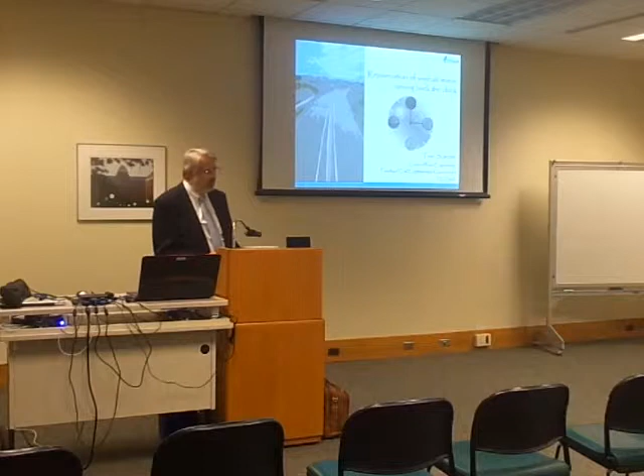Rejuvenation techniques also meant that as a group of road engineers, we had to step back, because a lot of these techniques do not imply I make something, I break it, and I sell it, but please help me to understand why it is better before I even make it. So as a group, we were led to smaller and smaller scales in the hope that, if we work with the industry at that level, we could influence the deliverable, we could participate in the deliverable, we could learn, but also they could benefit from our expertise. So what I want to present is really an attempt to engage a whole sector of experts, always leading to a better product, a better paper.

Very quickly, I wanted to show where I come from. This is an overall view of Delft University of Technology. We are the only technical university in the Netherlands. It means engineering is only done in Delft. You can see the civil engineering building over here. You can see Rotterdam on the horizon. The Netherlands is a small place. Before you get lost, you hit a border, and then you know it's time to come back. So you can see many cities from my office.

We have a number of faculties, the faculties that a typical technical university will have. Civil engineering is an average size faculty. We are combined with geosciences, and we provide civil engineering education in the Netherlands.

Because we are a technical university, we operate at faculty level. We have a faculty of civil engineering, not a department, but we have departments within the faculty. And our department, I put it down here, the pavement engineering group, about an estimated 5 academics and several PhDs, masters, postdocs, etc.

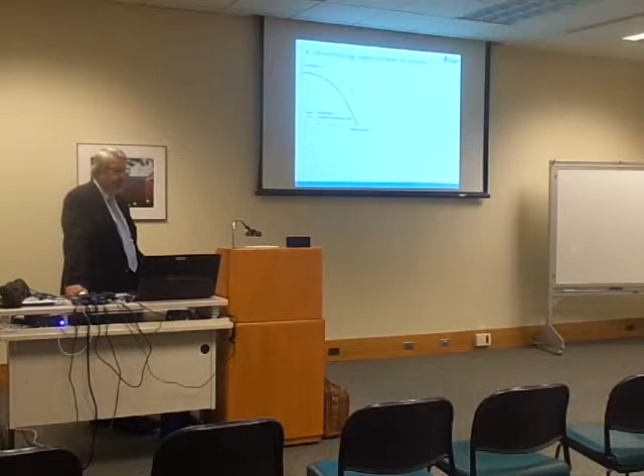At the average life of pavement, normally if you do nothing, it will tend to degrade, as I tried to show here in the sketch. As time passes, performance drops, because material properties degrade. One idea is to say, okay, every now and then I'm going to do something. I'll wait for a few years, and when my performance, whatever you choose to call performance, reaches a level, I'm going to do something.

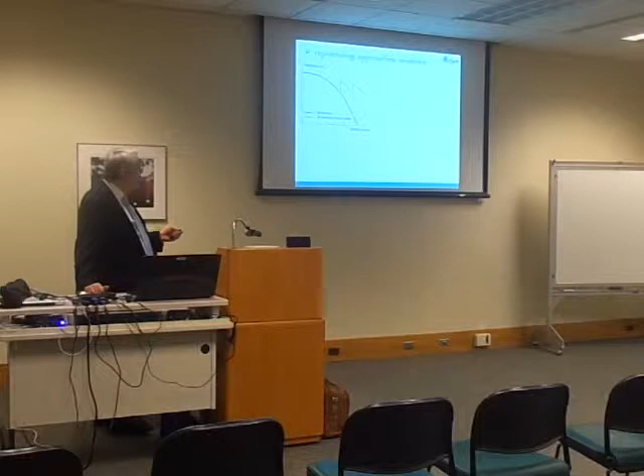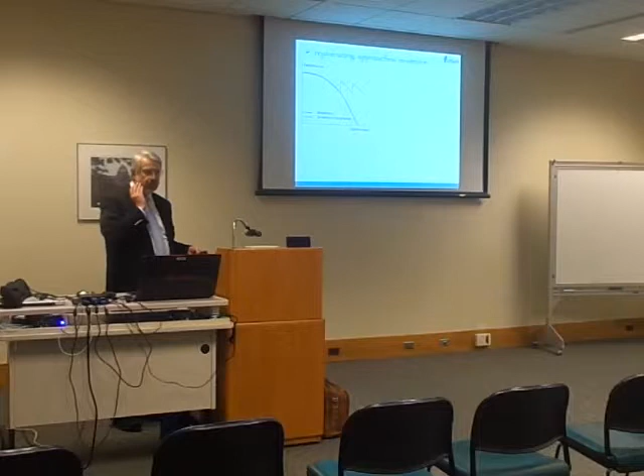And in terms of the rejuvenation techniques, the name that you see in the industry is the in situ. So you have a pavement there, you don't go and remove the material. That's another thing. You have to try to do something to rejuvenate. When you put cream on your face, you don't take your face apart, you hope. So the first level of techniques that I want to look at today at least is this: techniques which allow you to really make the material new.

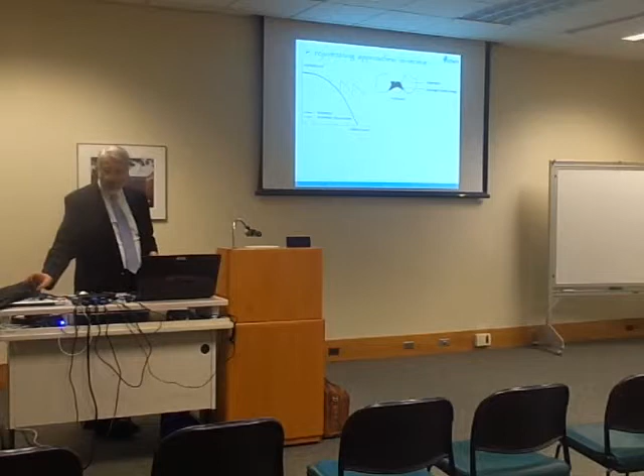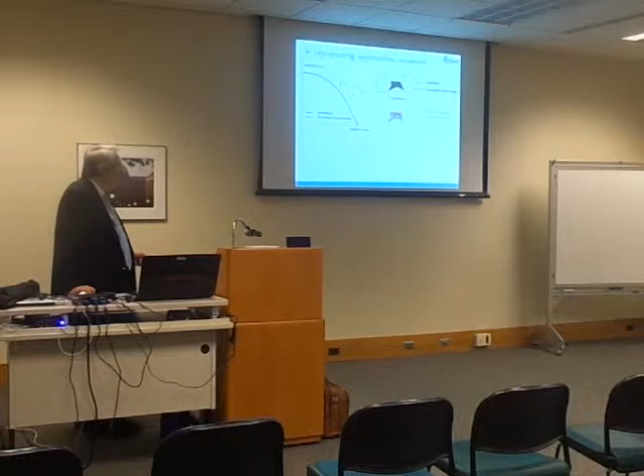How do you do it? Well, let's say on the local scale you have two pieces of aggregate and some material in between, which, because of aging, because of punishment, can be because of the weather, environmental effects, whatever, started going harder, cracking up, misbehaving, degrading. One possibility is to go and put something, a face cream. That's what it is. You apply it, hopefully not with a piece of cotton, but with a spreader. At night, so you don't disrupt the traffic, or on the weekend, less traffic.

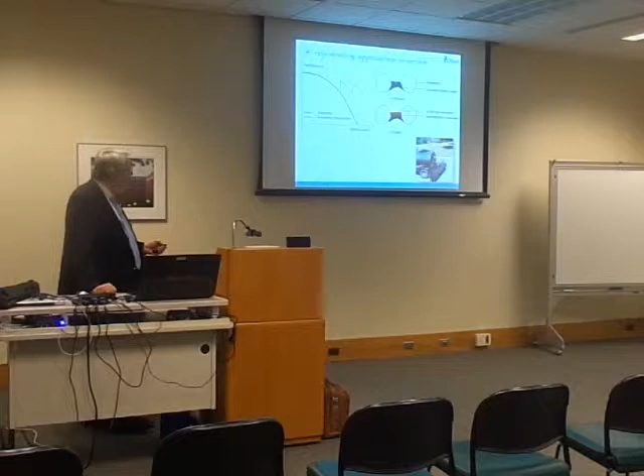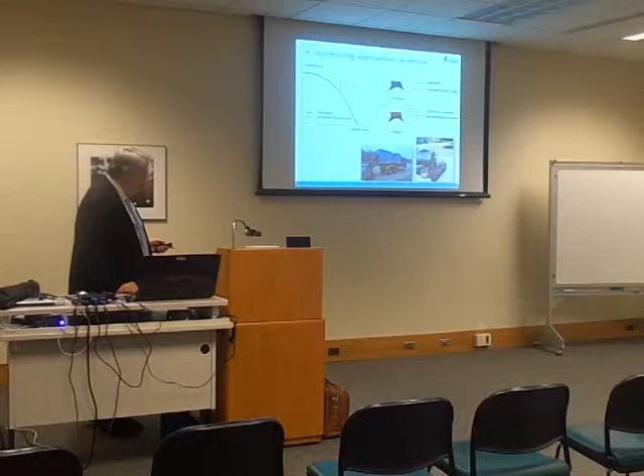This thing tends to just stick there. Some of the techniques that are available have equipment following the spreader, which blows air into this still warm new material in the hope that it drives it down into the pores, into the structure of the surface. And then, depending on what you choose to do, you may or may not have some surfacing. For the first few days, this is still a bituminous solution-like material. It's slippery. You may put some sand or some other material on top.

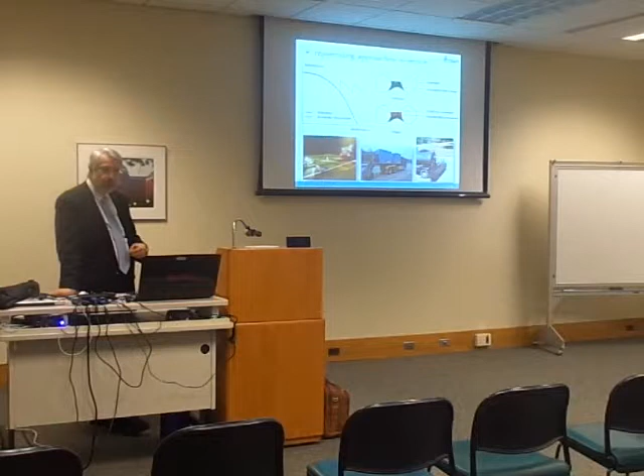But the basic idea is this reddish area here, which shows that a new material has been placed on top of the existing bitumen in the hope that it will interact with the bitumen to improve it. You're not making a sandwich. You want the new material, the red material, to gradually infiltrate into the old stuff and rejuvenate it. And we'll see if and how it happens.

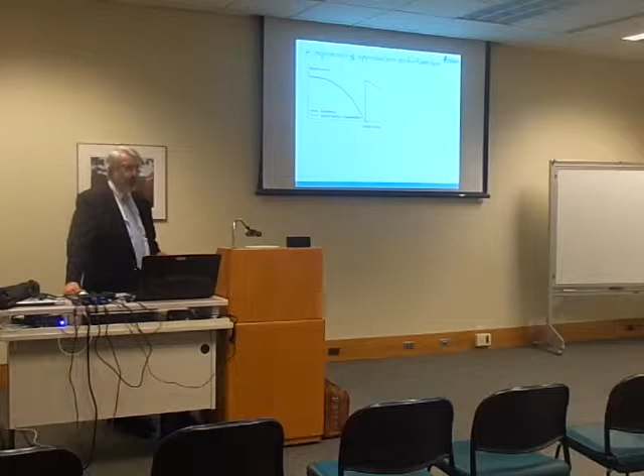The other technique is to say, well, for better or worse, my pavement is done. I was too late to do it early, or I'm rich enough to do it from the beginning today. But the material that is out there, the material which you can take as recycled asphalt now, to put it back, that's what we do, is already degraded. If you just take it and put it back again, you haven't done very much.

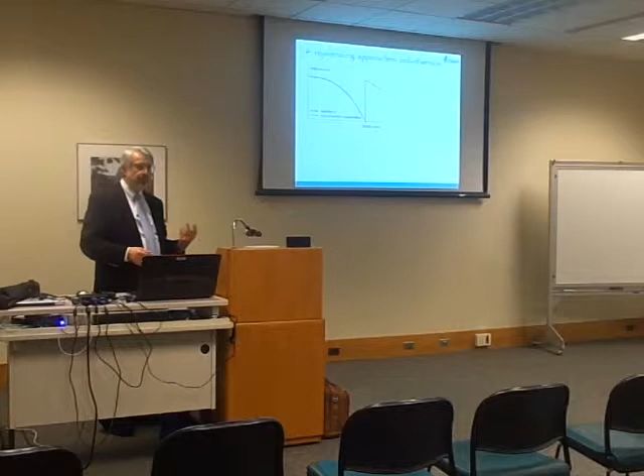So, as another technique, yes, you can recycle the material that you feel is damaged, but that will not be enough. You will need to do something to that material, mix it with new bitumen. It's a solution. Maybe expensive. Or mix it with something that will rejuvenate it in the mixer and will upgrade it when you lay it down again. It will give you almost as good performance, if not better. It's another technique. It presumes that you have already removed the material.

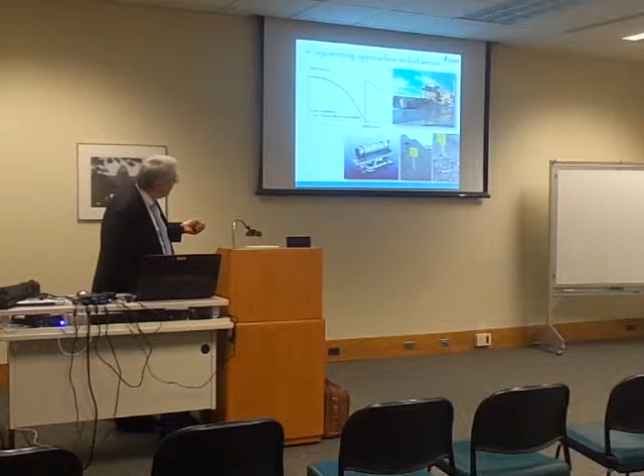You somehow made proper distinction of materials, proper division. It's not enough to just grind it off, mix it, and lay down again. You hope that you can do more sophisticated, and you can. You hope that somehow you have techniques, equipment that allow you to properly do this remixing process. It's not so simple as you say, but eventually it involves a removal at the end of service, a rejuvenation, probably in the plant over here, and then laying down again. And we'll see that there are techniques that do this.

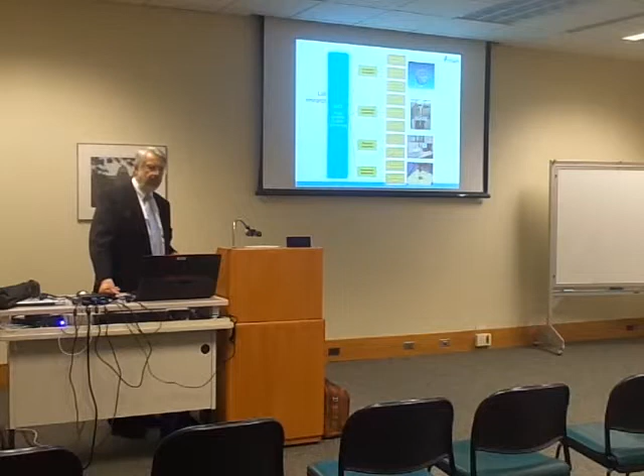As I said, in cooperation with our authorities, with our industry, we moved into this new domain for us. And our role was somehow to act as the bridge builders between the chemists, who belong to the industry and who know a lot of information about the individual materials. They can control the quality at chemistry level, but at the end of the day, the chemist needs guidance as to what he should do. He can mix many things and come with many products, but at the end of the day, you need the pavement engineer, the mechanics person, to guide them into what

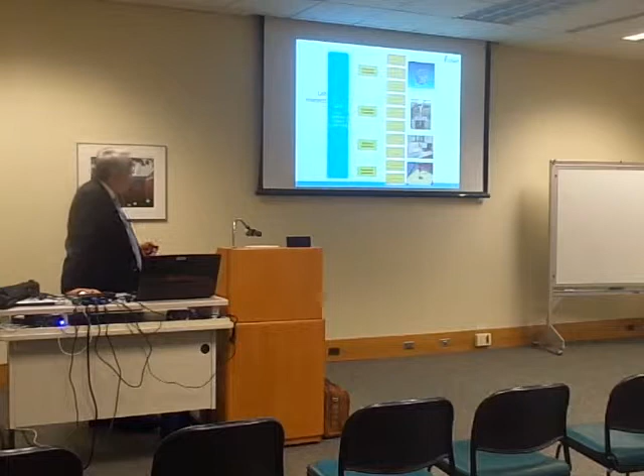is the objective. So you'll see that we spent a lot of time running several tests, most of them meant to guide us, to guide the chemists, onto where do we go? Do we choose this type of solution or that type of solution? This type of mix or that type of mix?

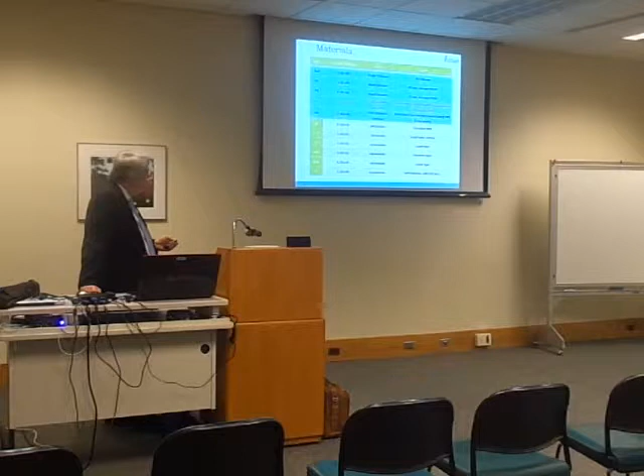Also, we had aged bitumen. We made them ourselves, and later on also others which came from field studies. We wanted to have the time and the effort to look at the mixing, the interaction of a range of rejuvenators, I only put a few here, but they're good, with a range of aged bitumens. Bitumens which had, by oxidation, lost their original goodness, the original material properties.

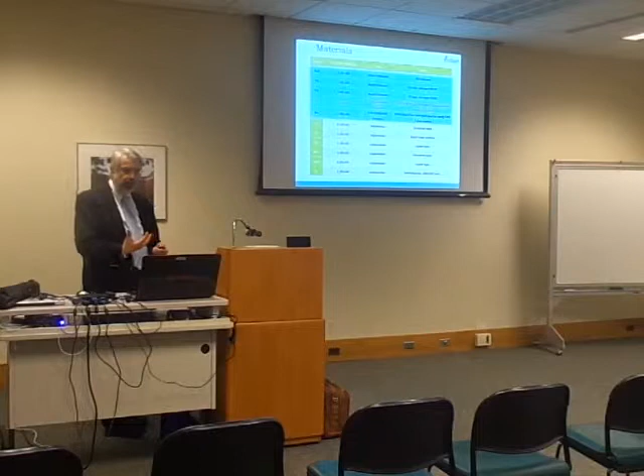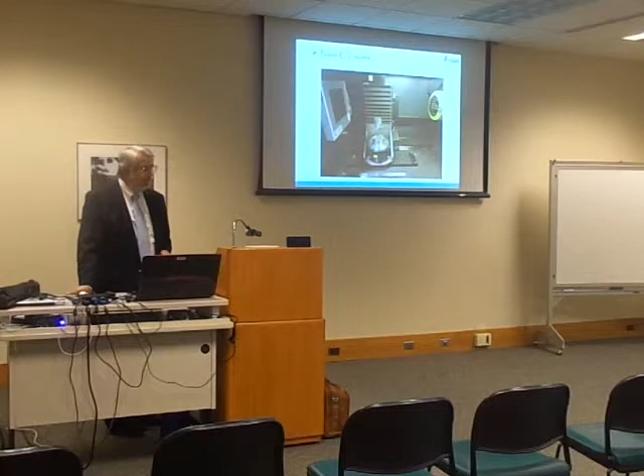of samples which were without any application of rejuvenator, and that's a typical gray image that you will get out of the CT scanner. But then we started looking at various techniques. Remember in the first few transparencies I showed that in some cases there are products which are just sprayed and then you drive away. Others, after the spray, there is an air machine that applies pressure to drive the rejuvenator in.

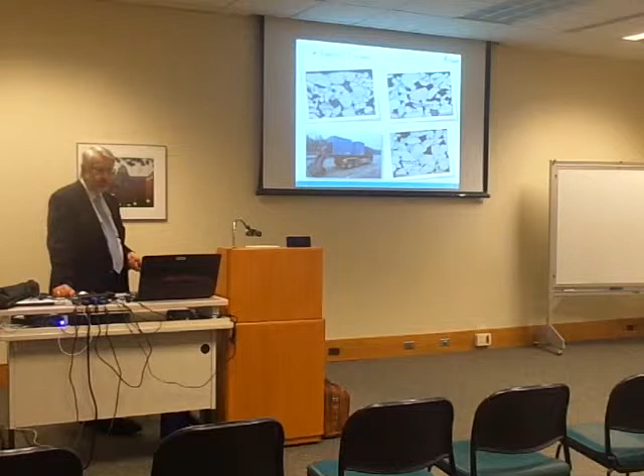For one particular product that I showed here, you see the green areas are the areas where, just because of the three-dimensionality and the large pore structure of that particular mix, there was some surface distribution of the rejuvenating material which was indeed applied on the surface by the spreader. Or the technique that was applying air pressure after it was made corresponded to this sample, where now you see a much deeper penetration of the same product. So encouraging the rejuvenator to go deeper is good. Okay, we do it.

This is a thin section view of what happens near the top over here. It's a small spot, you can see it, and the magnification is here. Forget the epoxy, it is for making the thin slice. What we're looking at is the stone, another stone here, the aged mastic, which is this darker reddish color in this picture, and then the added product, which was the rejuvenator.

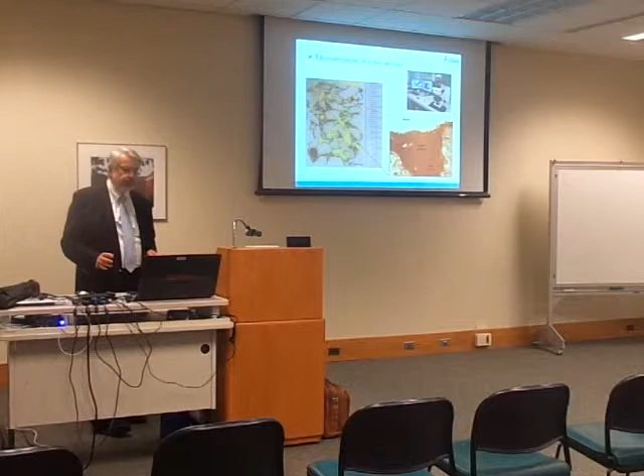Okay, one good thing is that we plugged the hole. Because of weathering, some of the bitumen is blown away. If we put something in, we plug the hole. Very simplistic, but it looks like it. And again, that's not what we started to do it for. But if you're interested in plugging holes, it works.

This is the same picture. And I'd like to ask you to look at an area over here, for example, before and after rejuvenation. This is the rejuvenator application. You see that now this area looks different than this one. See? But it's not only on top. If you look further down, you also see rejuvenator over here. See?

So if you do it properly, it doesn't just make a thin film on top. It can go further. It can help the aggregate structure a few centimeters from the top. Nice. Does it mix?

Okay, back to the CT scanner. We took a bottle, and we put bitumen at the bottom and rejuvenator on top. So this grayish, yellowish object is the rejuvenator. It's a liquid. And this was the bitumen. And we just left it there for some time. 30 minutes, 180 degrees. And the end product, this one. We didn't stir it, we didn't do anything. We just watched it.

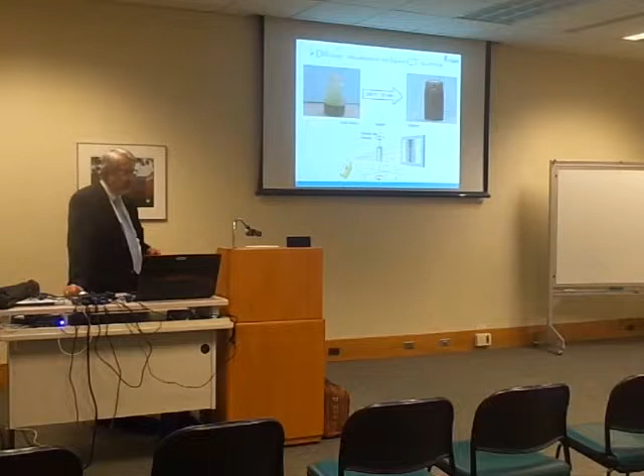Well, in reality, we were not watching it. The CT scanner was. Well, I suppose our student was there. And the CT scanner had better eyes than me because it could see much more.

Same phenomenon. This is the interface, and bear with me. I don't know if you can see it from your place, but there is a change in grayscale below where this arrow is. There is this area here, which is slightly grayer than the area above it. And in terms of the CT scanner's eyes, this line here is really this line here. And remember, this is just a one-time shot.

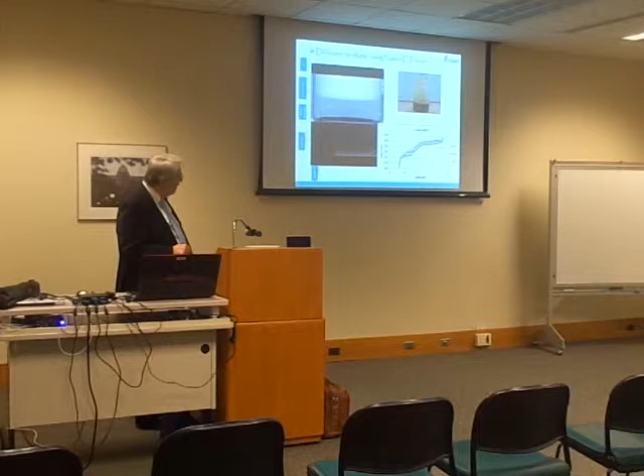The phenomenon develops. What you also get free from the scanner is these colorful images as a measure of the grayness. Look what happens here. There is a gradual interface developing, which if you plot it sideways, looks like this. The interface is here. So at very early time, this pink here, you get this blue line here. But as time passes, it becomes the red line, the green line, and later on, if you wait long enough, you get pictures which more or less show the flat line.

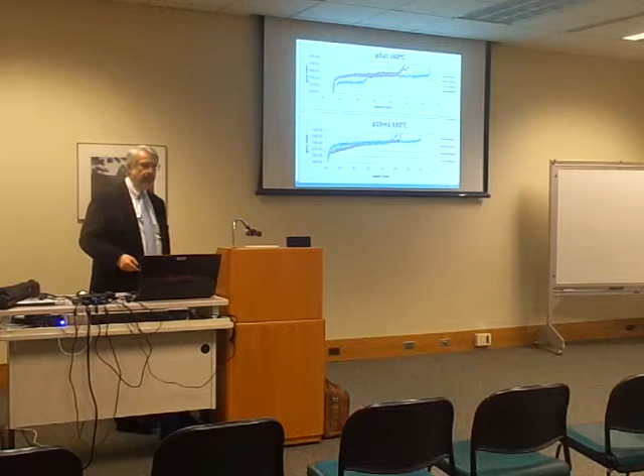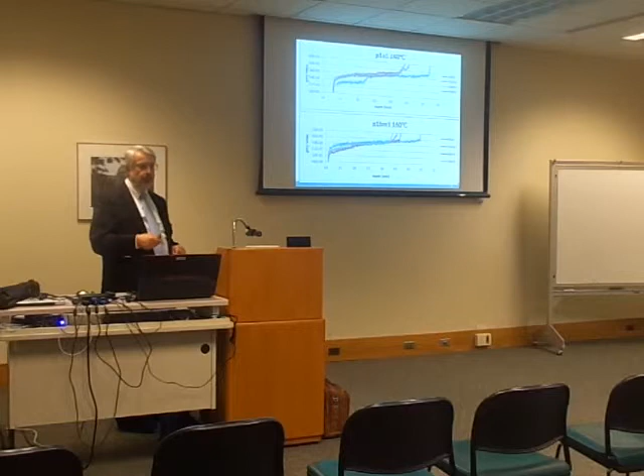There's no interface anymore. The theory of mixing, hopefully it works, likely it works, allowed the two liquids, quote, to remix. But it means that at the end of time, 90 minutes, I had one uniform density. I had another material. And if I have these curves, then I can start thinking in terms of calibrating the parameters of a diffusion model.

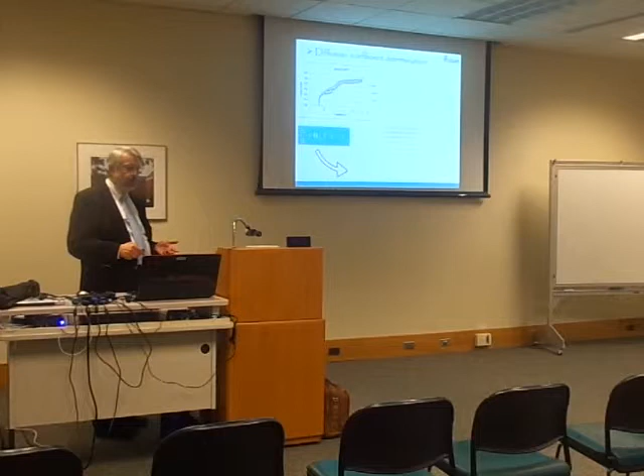The parameters of a model which will allow me to play what-if scenarios for many more parameters. It will allow my industry to decide how to choose the new component, how to minimize the time that it takes to go from the discrete interface to the flat interface where you have a uniform density. Because the sooner it happens, the better. If you have to shut down the road for 3 weeks waiting for diffusion to occur, you don't have a product. If it can happen the same night, 90 minutes, next day it's usable.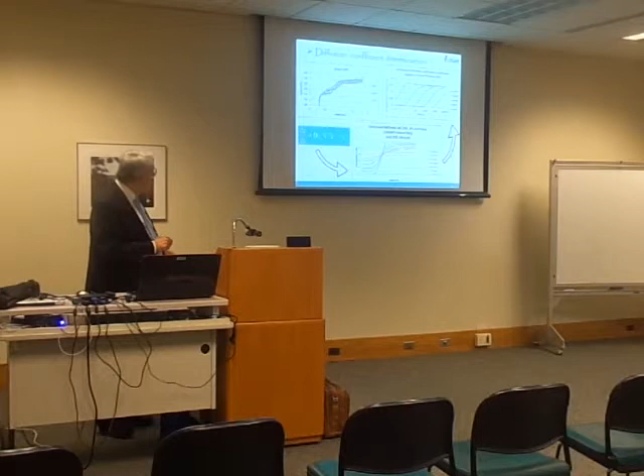So one can produce diffusion models, if you wish, just by using the results from the CT scanner to help the selection of materials. That's what we started. So we have a rough model that the industry can use to choose the component. Nice.

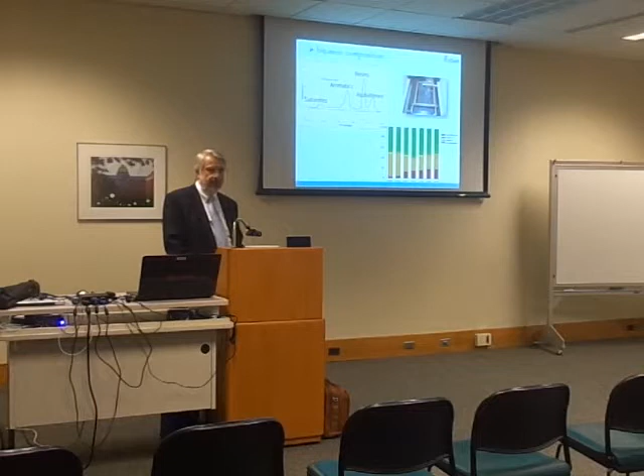But those of you who are into bitumen will agree with me that decades ago, people realized that there is no such thing as simple bitumen. The running joke we were making for many years is that it makes a difference if it comes from the tail or the nose of the dinosaur, but certainly it makes a difference geographically where it comes from. You can use chemistry techniques to look in a more groupy way at what is inside the bitumen. You can decide, decide is the keyword, to divide it in primary groups.

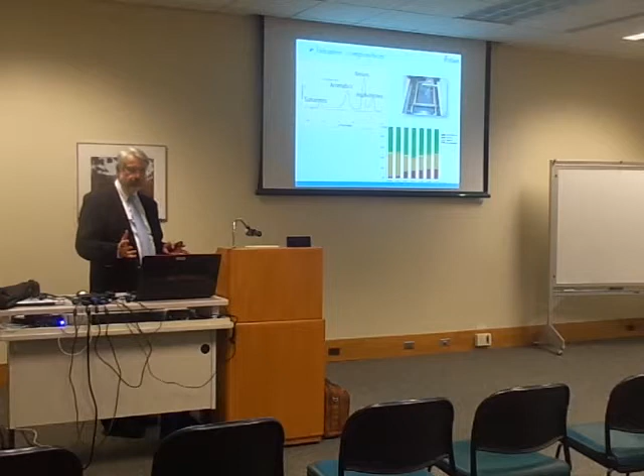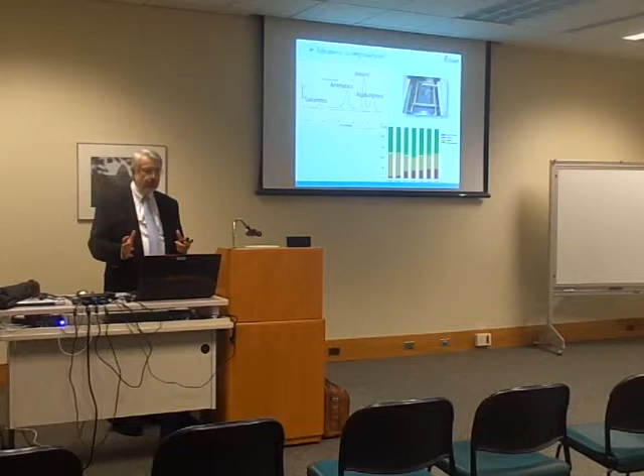And if you look at different bitumen coming from different origins, the percentages of the chemistry vary. And they can vary significantly. Compare this one to that one. So apparently, that chemistry will also affect my diffusion. When I was doing my diffusion, I looked at it as a homogeneous liquid, bitumen. Now somebody tells me, no, it's not.

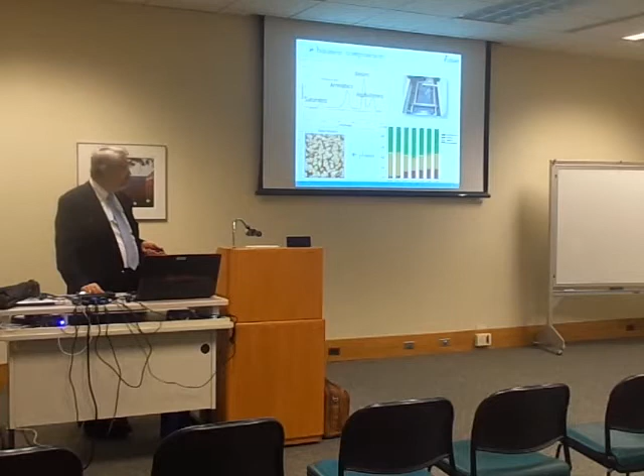If you look very closely at that bitumen, it looks like this. It looks like a bunch of bees put together with something in between. These are real pictures. They're very small. This is 10 micrometers, I think. So not only chemically it's different, it's got bits in it. And some of them mechanically are harder, bigger, stiffer, stronger than others. And all of them have to go and mix with the rejuvenator, which is also of a bituminous nature.

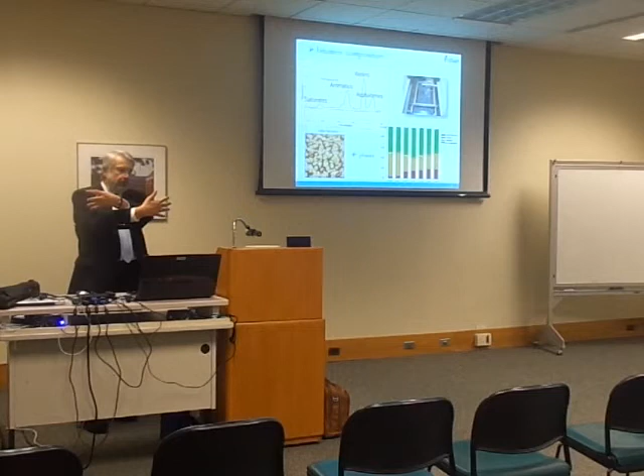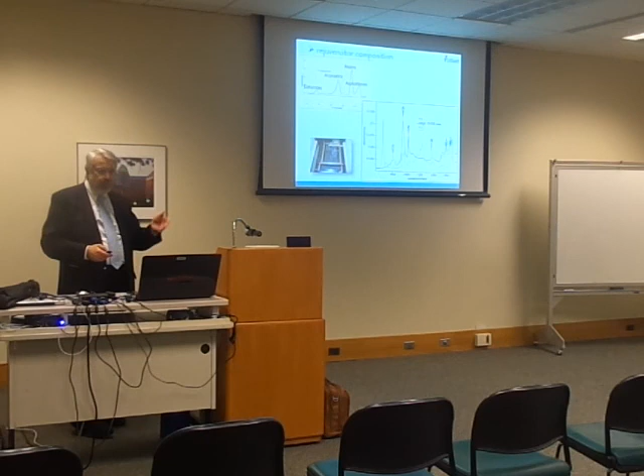So now you're going to have the bees of one fighting with the bees of the other to try to find a way to go across. Some of them will never make it. If you're not careful, they'll just sit there. Others may go very fast, but perhaps they have no use for you because they're very soft. They have no strength. If indeed my rejuvenator has the same sort of chemistry variations as my bitumen, then if I take it through the same chemical analysis, it will look the same, and we did. P3 here is one of our aged bitumen.